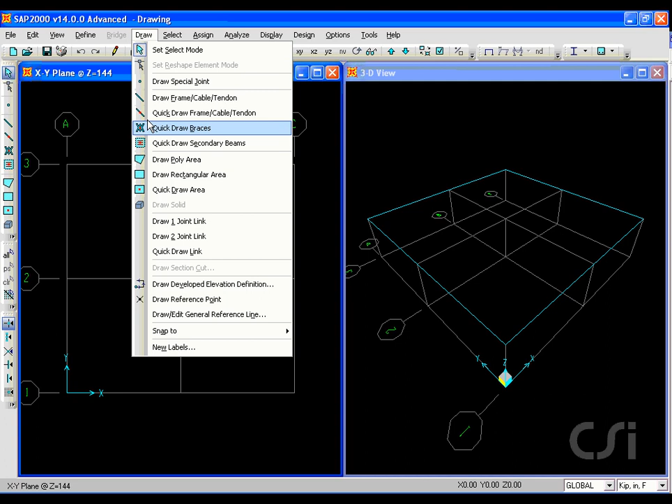SAP 2000 has many drawing tools to facilitate modeling, and this tutorial will demonstrate a number of them. Most models are constructed using either frame objects or area objects. We will start with the Draw Frame command. We can draw frames anywhere when in a planar view of the model.

A right click will lift the pen, but will leave you in the draw mode. You have the option to snap to grids. But again, you may draw anywhere in a planar view.

You can also draw in a 3D view, but the starting and ending points must snap to another item, such as grids, endpoints, and the like. If we try to simply start the frame in space, the point snaps to the origin. You must also snap to end the frame.

There are a number of drawing controls available, including horizontal, vertical, parallel to angle, and others. The letters in the parentheses indicate the hotkey letter to activate the option. If we hit the H key while drawing, the line will be horizontal no matter where the cursor is.

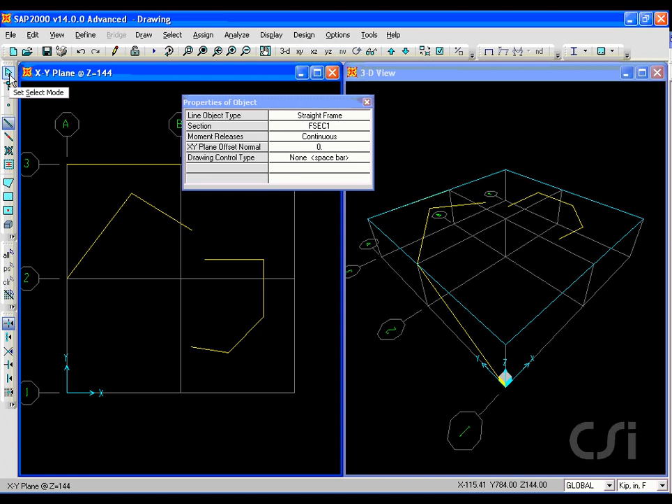The Quick Draw Frame command allows us to generate a frame on a grid with a single click, or on a number of grids by using a selection box.

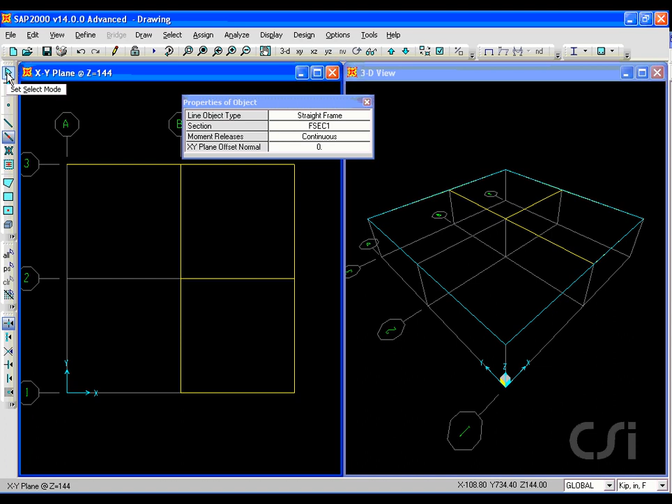Once frames are drawn, there are a number of ways to edit and modify them. One way is to right-click on an endpoint, which brings up the point information form. Select the Location tab and double-click on one of the coordinates. This displays the joint coordinate form where you may edit the endpoint coordinate.

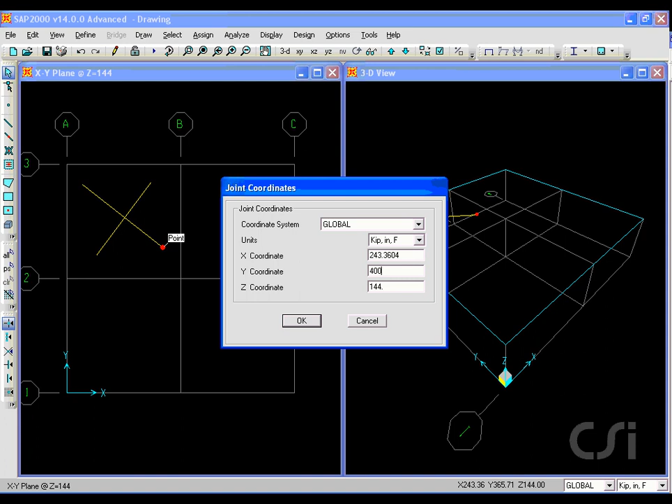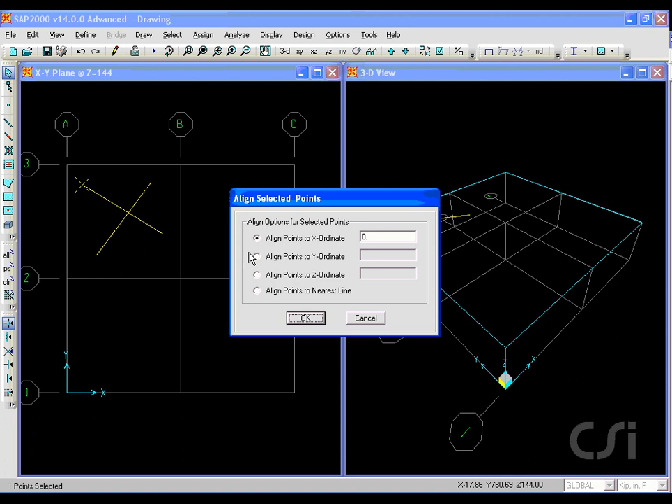You may also move an endpoint by selecting it and going to the Edit menu, Edit Points, Align Points command. If we select the Align Points to X-Ordinate option with 0, the endpoint will be shifted over to the Y-axis.

The Set Reshape Element Mode command also allows the geometry to be modified. With this command, simply select and hold down the mouse button on the frame object to move it parallel, or select the member and grab one of the endpoints to stretch and rotate the line.

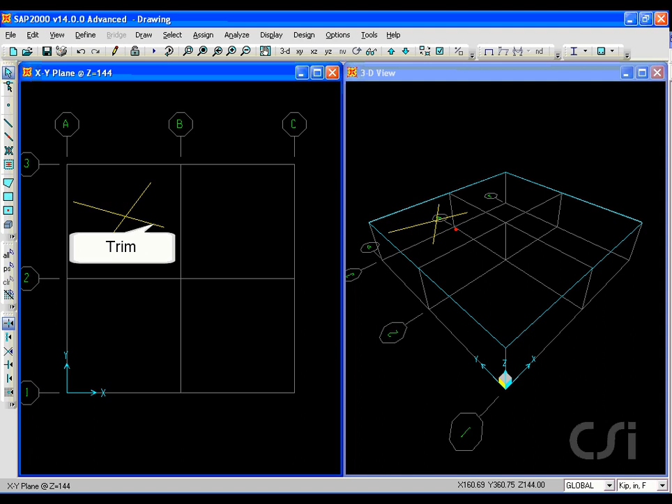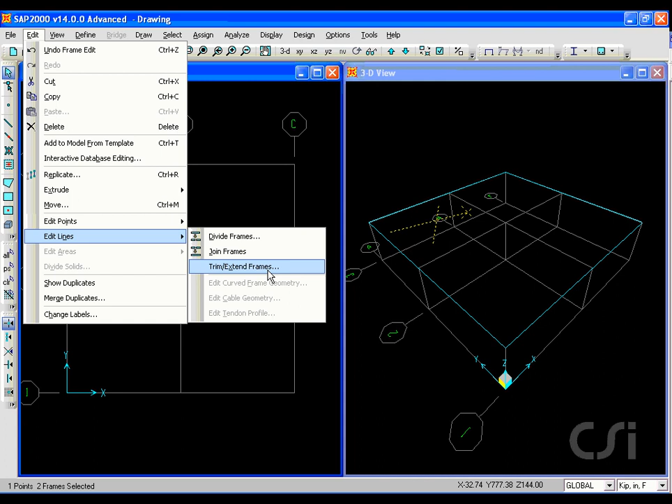Next, we will trim off the segment of the line that extends past the intersection point. We do this by selecting the line to be trimmed, the endpoint on the side to be trimmed, and the line to be used as the trim line. Next, go to the Edit, Edit Lines, Trim Extend Frames command, and select Trim Frames.

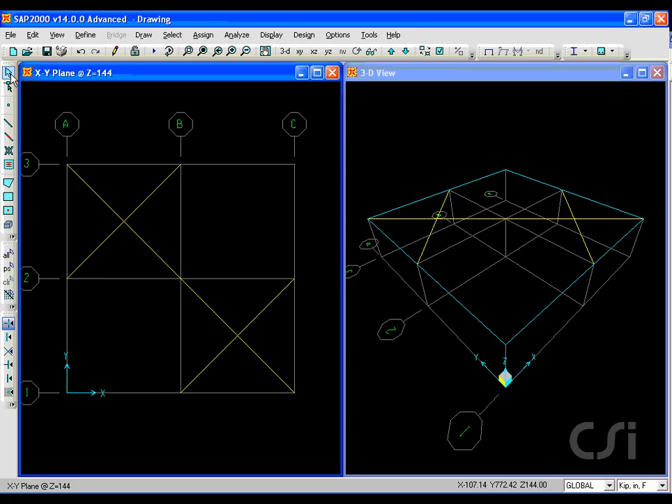The Quick Draw Braces command allows for the generation of bracing with a single click in regions bounded by grid lines. To create secondary beams, select the Quick Draw Secondary Beams button and click in a region bounded by grid lines. The orientation may be in the Y direction,

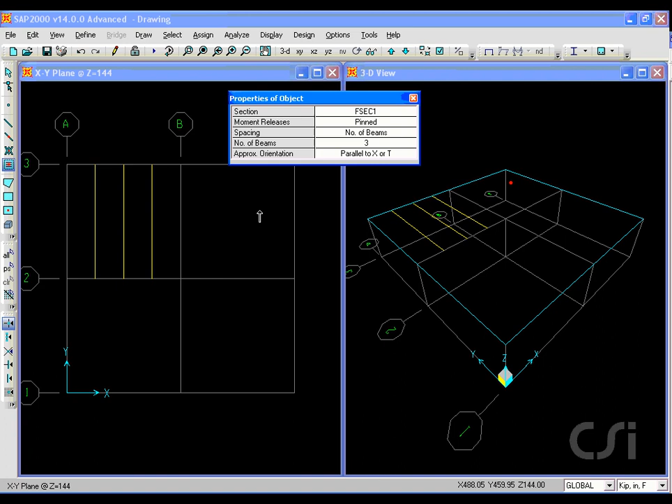the X direction, or in a direction normal to the edge nearest your click. This last option makes quick work of adding miscellaneous framing.

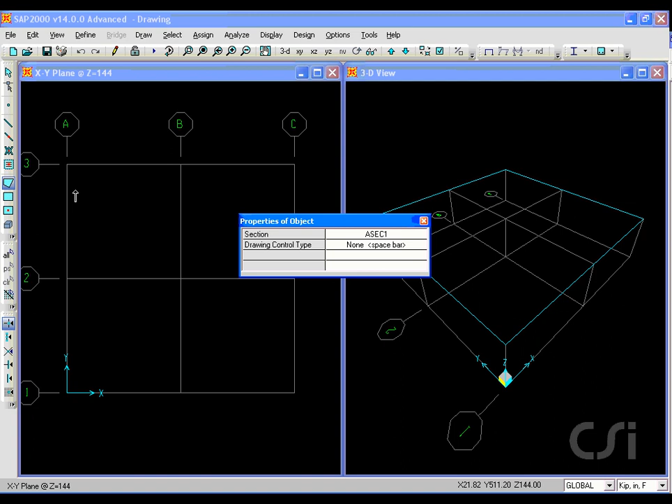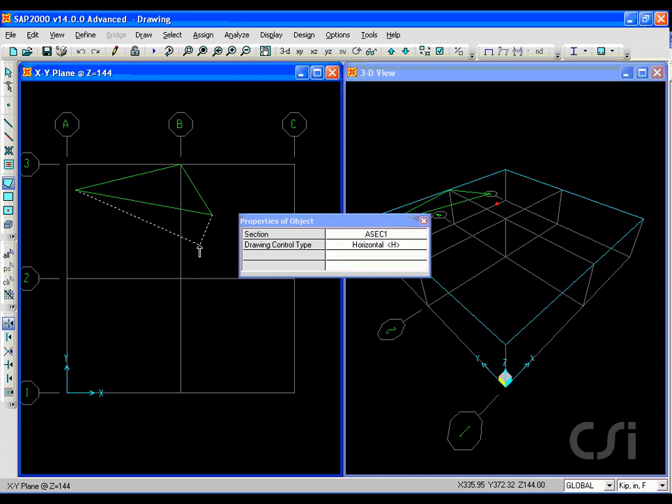Next on the list of drawing tools are the area objects. The Draw Poly Areas command allows us to draw a completely arbitrary polygon, where we can use snaps or no snaps to lay out the geometry. The Draw Poly Areas command has the same drawing controls for edge control as the frame objects did, including the horizontal and vertical options. Note that again, these options may be selected using the hotkeys. Hit the Enter key on the keyboard when your area object is complete.

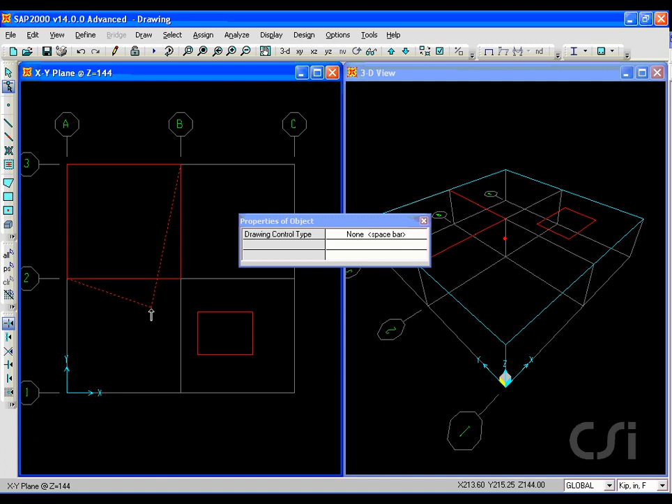The Draw Rectangular Area command allows us to generate rectangular areas by clicking, dragging, and then clicking again to finish drawing. These boxes may be any size. And although these elements were drawn as rectangles, using the Set Reshape Element tool allows us to easily change their shape or to move them.

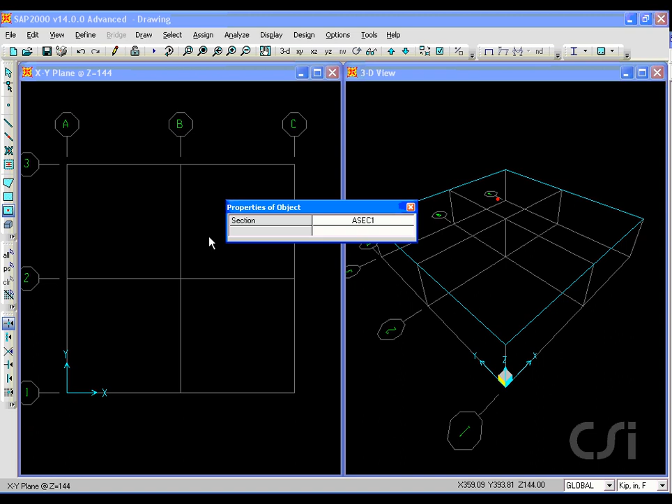The Quick Draw Areas command allows us to create area objects in regions bounded by grid lines with a single click, or in multiple regions by windowing. Throughout this tutorial, we have had the Snap to Points and Grid Intersections option on.

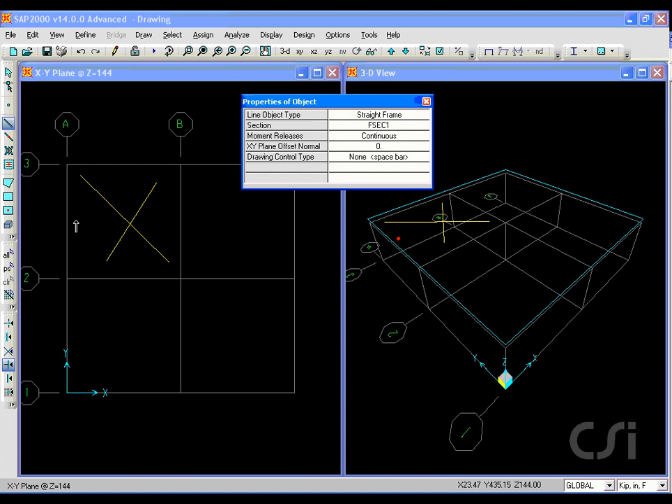However, there are many other Snap to options available, including Snap to Ends and Midpoints, Snap to Line Intersections, Snap to Perpendicular Projections, whereby a line can be drawn perpendicular to any existing line. And snap to lines or edges.

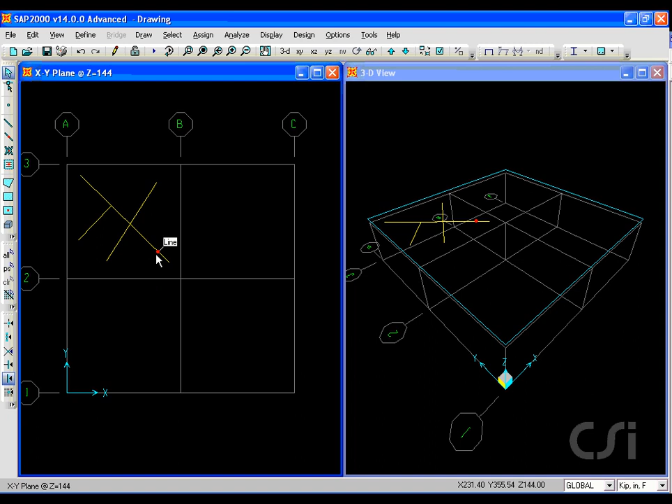This concludes this tutorial.